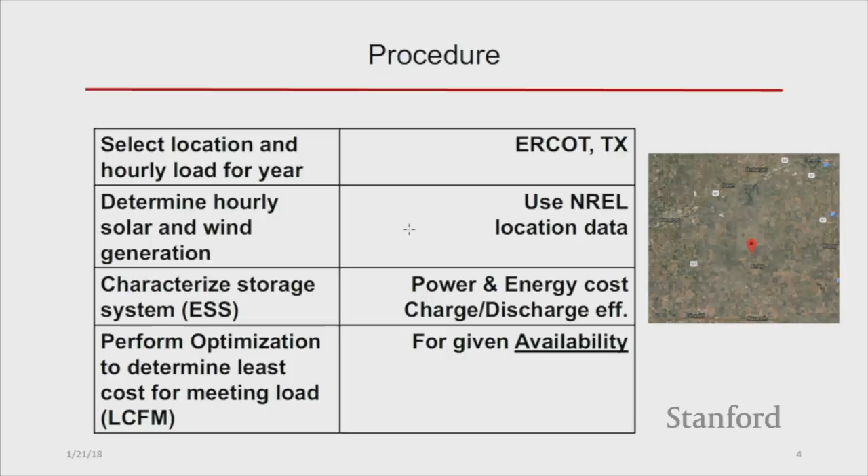And here's how I'm going to look at this problem. I'm going to use this procedure. First, as an example, I'm going to choose one load area. And what I did is I chose a load area as close to my birth date as I could. It turned out to be in the middle of Texas, in the ERCOT service area. I looked at the load, or ERCOT presented me with a load at every day of the year. I think I took the year 2016. I and my colleagues, I should have mentioned my colleagues on the first slide. If you can say Deutch doesn't know anything about storage, Yet-Ming Chiang certainly does. So the demand load I'm meeting is at ERCOT for this year, every day of the year, 100% of the time.

Then we perform an optimization, which I'm only going to give you the results of. I'm not going to go into it. And secondly, that we do it for fixed availability, saying what percentage of that load do I want to meet? Here is the answer on this one chart, and I will spend a few moments going over it.

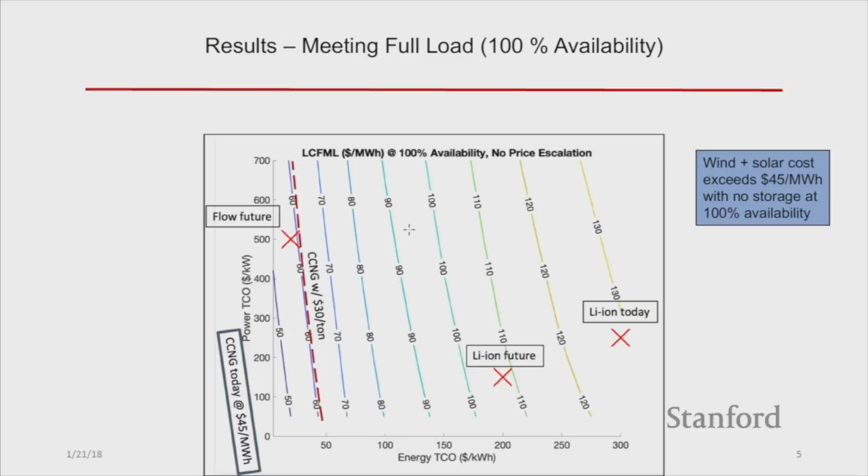On the base is the total cost of the energy system measured in dollars per kilowatt hour. On the y-axis is the power of that storage system measured in dollars per kilowatt. Now, we know where some of those storage technologies are on that chart today, and we have estimates of where they'll be in the future, but I allow you and your investment advisors to say where they're going to be a few years from now. You could choose where it's going to be.

And I should underscore heavily that the storage system here, I'm agnostic with respect to technology for storage. But we are looking at such areas as using more hydro storage, pumped and conventional hydrodynamic storage. We are looking at compressed air storage. And of course, we're looking at an array of battery types. And for the sake of illustration, I use here both lithium-ion batteries and flow batteries.

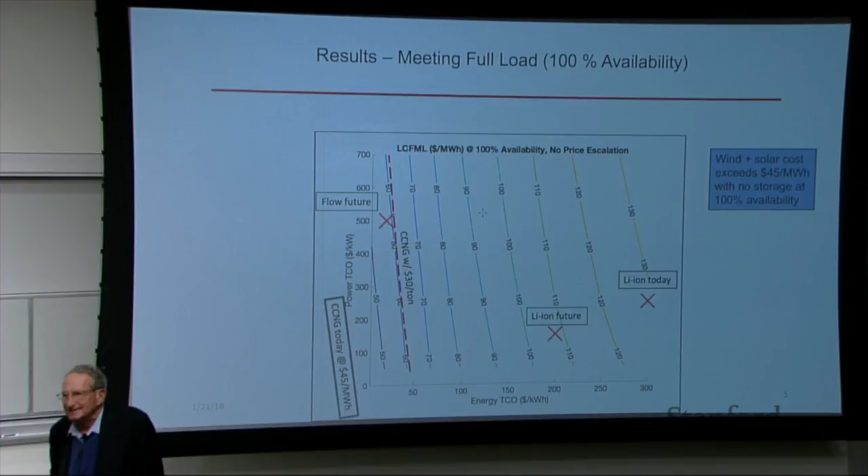And I mark there with an X in these two variables that characterize their cost, power and energy. I mark with an X the present cost of lithium-ion batteries, the projected future cost, and I compare it to flow battery costs. On the chart, the result of the optimization tells you the least cost combinations which will meet that fixed load at that point in the ERCOT service area.

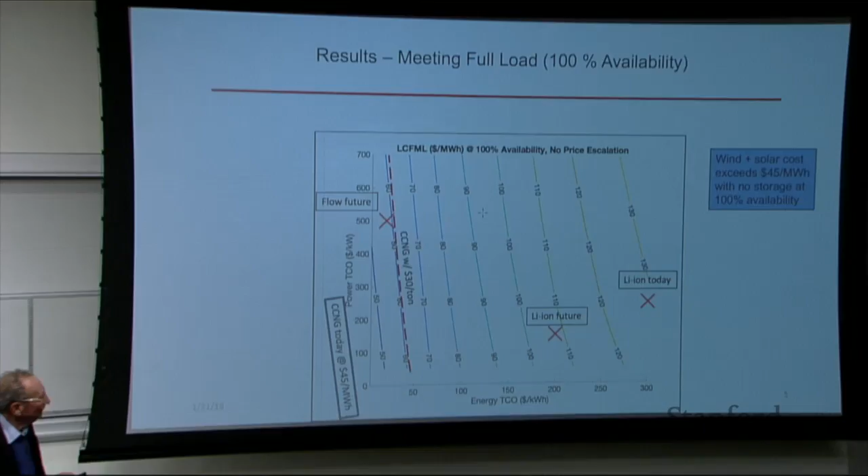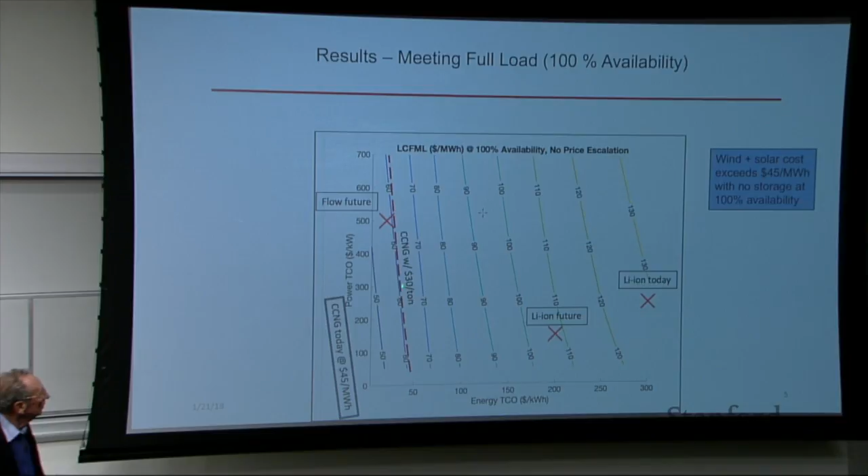So if you look at the curves, they are measured here in dollars per megawatt hour. So they go from lithium-ion today, if you have to use that, you'd be paying $130 per megawatt hour, or 13 cents per kilowatt hour, quite a high price at generation. But if you look all the way in the future, you can see that at the flow battery proposed future cost in the two-dimensional choice that you have, you would be doing $60 per megawatt hour, 6 cents per kilowatt hour, which is what we are told by those reliable people in New York.

Now I've lost the name of the bank, which says, what's that? You see, this is why you can't trust. You just can't trust people here. So they know the names of banks. I don't know the names of banks.

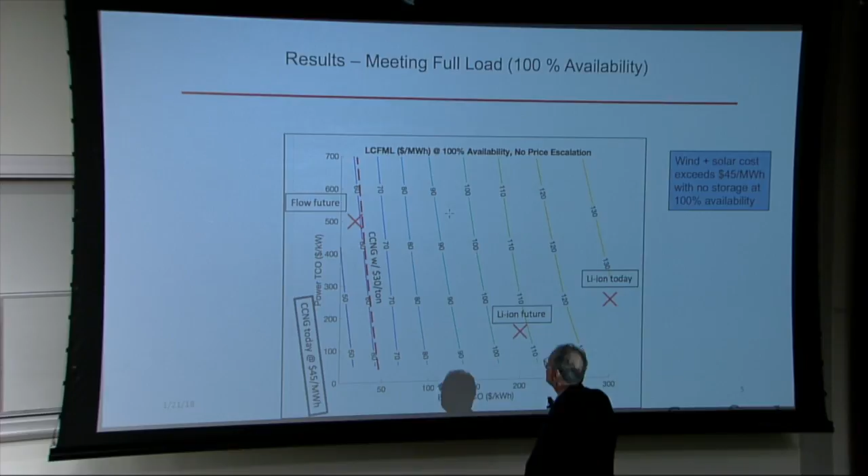So in any event, there it's $60 per megawatt hour, 6 cents per kilowatt hour. And there you see the combined cycle natural gas price falls right on top of it. So future batteries would make it, if you believe that number of the cost of the storage. When wind and solar together exceed $45 per megawatt hour, you are always going to be above the combined cycle natural gas price of today. That's why it lies outside this curve. So that is about it for this chart. It's at 100% availability, no price escalation, and you can choose your storage in these two parameters.

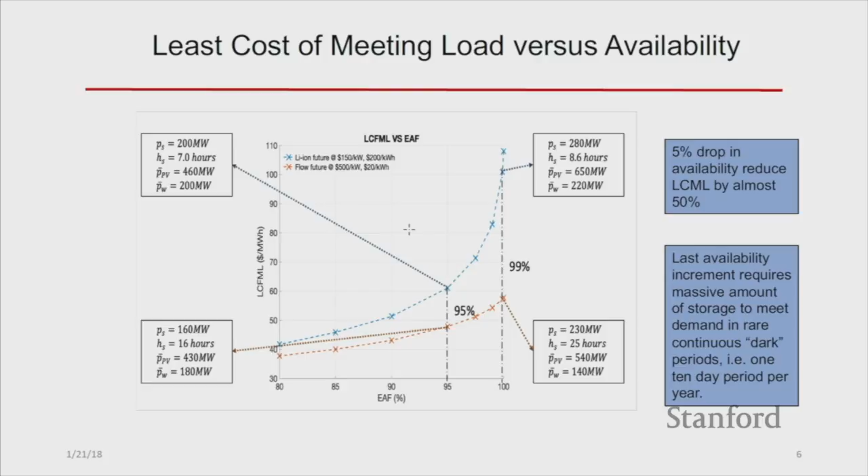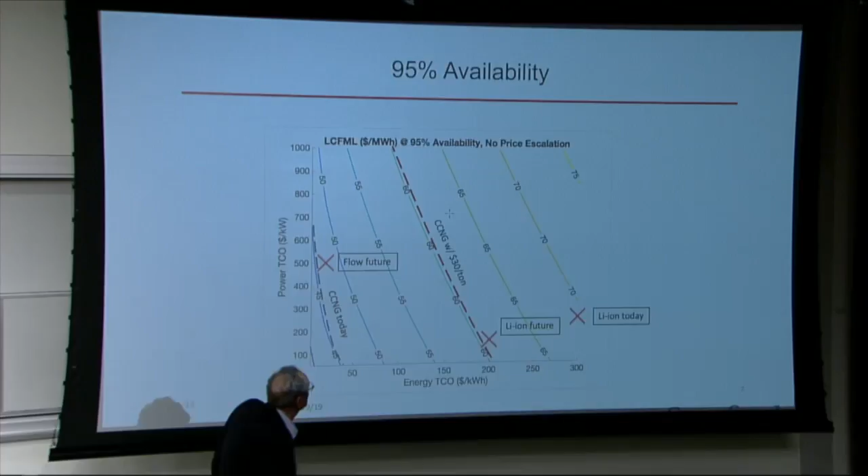If you choose pumped hydro, you have an entirely different point or region on this chart than if you choose batteries or compressed air. Okay. Now, the least cost of meeting that load depends upon the effective availability factor that you have chosen to adopt. If you want to choose 100% meeting that load, then you are all the way up at the highest cost point. The effective availability factor at 100% is way up there.

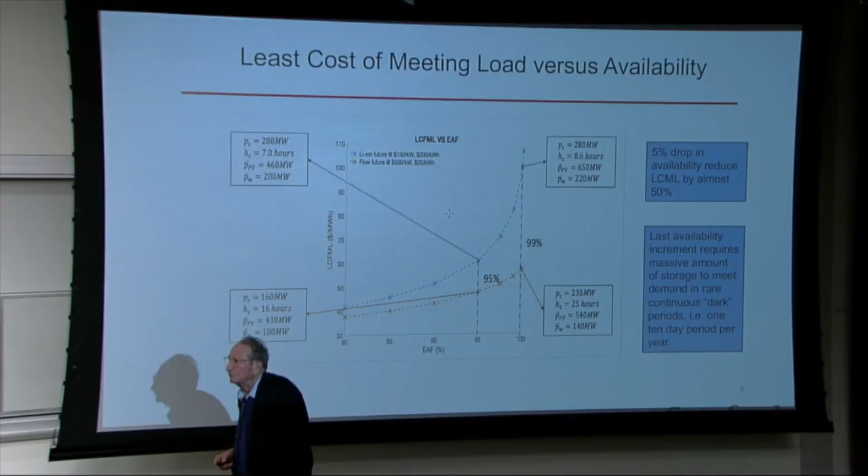At 99% for two different kinds of storage, I just chose lithium-ion future or flow battery futures, you would then have this mix of storage parameters, but your price, as you can see here, is at the level of very high costs here. $100 per megawatt hour, 10 cents per kilowatt hour. Is that right?

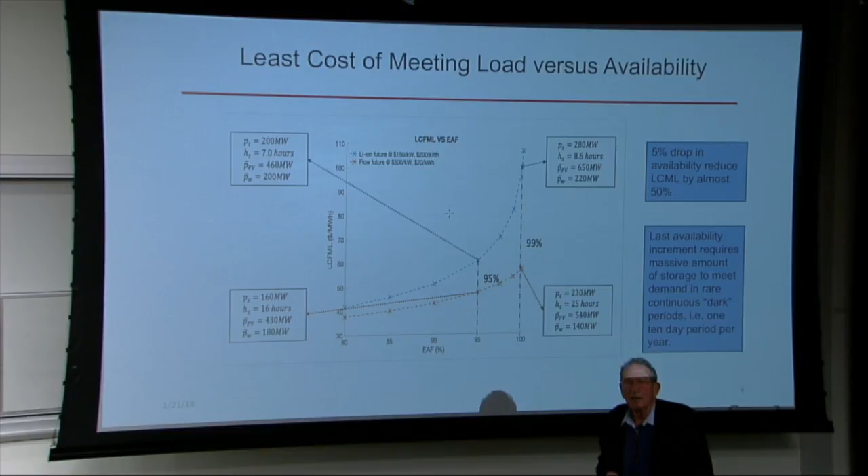Right. But if you bring it down to 95% availability, that is, you give up 5% of the time, you will be choosing another generating technology, one that produces CO2, like natural gas combined cycle. You drop that cost almost by 50%, depending upon, again, the storage technology that you're using. So you have to say to yourself, is it really true that with this hybrid system I want to reach 100%, or will I be satisfied with 95%? And you see here the great benefit that you get by dropping your availability from 100 to 95%. This is the way the curve shifts.

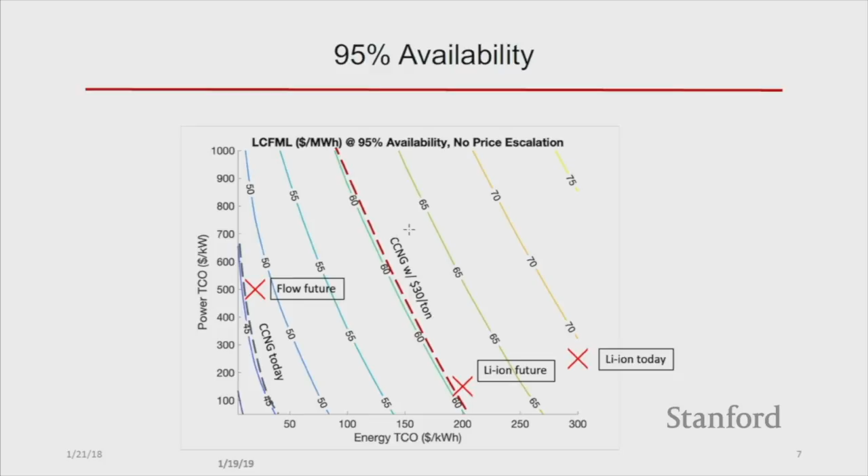And when you look at the calculation with 95%, exactly the same optimization as before, you see that now lithium-ion of the future is exactly the same, or roughly the same, as a combined cycle natural gas with a $30 per metric ton carbon charge. If you look at the flow of the future, you're even in better shape. You're equivalent to the cost of combined cycle natural gas generation without any carbon charge. So you are in the ballgame, very much so in the ballgame, just by giving up that 5%. It's really quite impressive. And it may even be true.

Well, what do I do if I'm 5% short on load? I have to find a way to claw back the load. And the first thing I can do is I can go to the consumers, whether they're commercial or individuals, and say, look, don't use any electricity for this brief period of time when this will happen, and we'll pay you money for that. So there's a demand response to this sharp availability drop. That's one way I can do it.

Another thing I can do is, if I didn't live in the United States, I could build more transmission lines to get more places, origins of generation to the place where I have a shortfall. Of course, that means not only you have to cover that expense, but you also have to deal with the regulatory burdens of getting more transmission. Or the third thing I could do is I could make a deal with a utility or an electricity service provider some distance away that they will agree to have a kind of an insurance pool that they'll provide me.

Or the last thing I can do is I can actually burn some combined cycle natural gas generation and produce CO2. Even there, I urge you to be calm, because Sally is going to figure out a way, and is going to propose a way, to use carbon capture and sequestration for that small sliver of generation to get rid of that. My point is there are many different ways of dealing with the advantage of having only 95% availability rather than 100% of availability. Going for 100% is always a mistake in the world of economics.

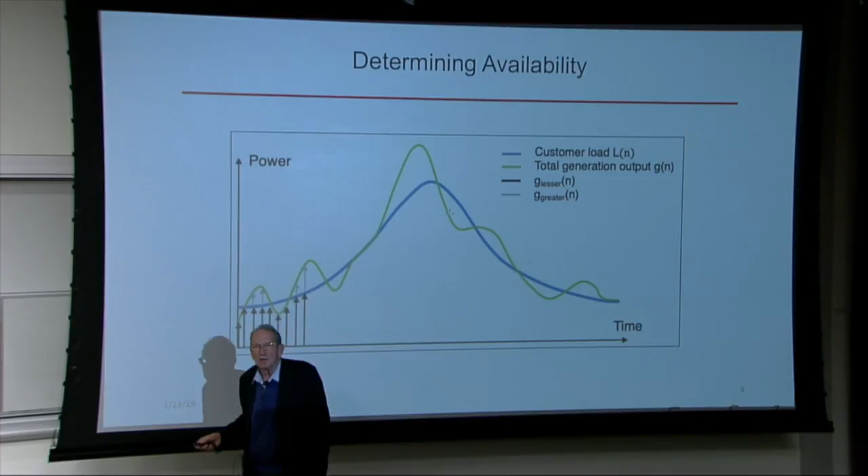But there are other times when the load is above the net generation. And there I'm not meeting load, and I have to curtail load through one of the ways that I mentioned to you. For those of you who don't believe that I can do an optimization calculation of this type, I have collaborators who can.

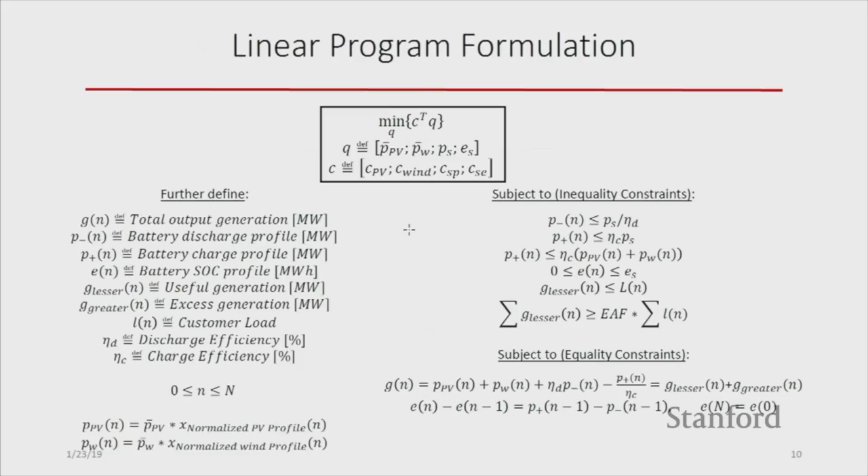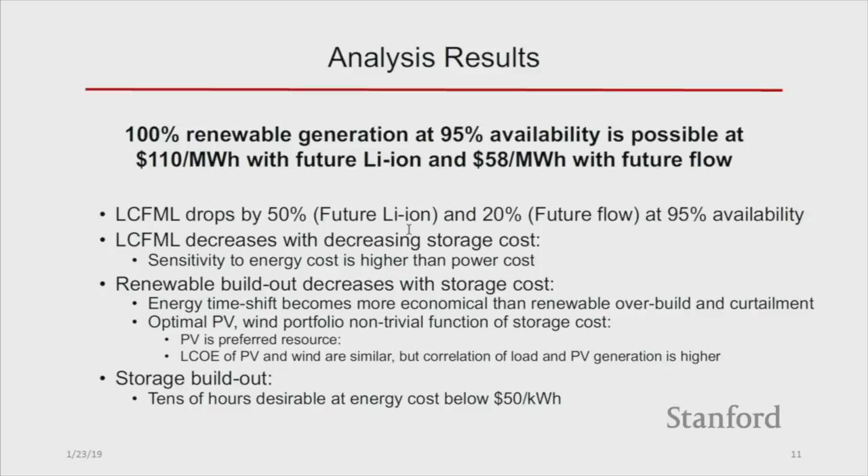What are the results? The main results that I want to share with you today is that the first one is what I said. You are going to find yourself very shortly in a situation where storage alternatives, when matched with existing solar and wind generating systems, will be able to meet load extremely effectively. As I said, dropping 5% of load cuts the costs of meeting the load by 50%.

What happens with respect to different shifts, if renewables become less of a contributor, as of course storage costs go down? Optimally it turns out the amount of wind and solar is about the same at this point in ERCOT because of the capacity factors of these two renewable generating technologies. And if storage gets much cheaper, or if you happen to use very inexpensive and available water, pumped hydro storage, you have a lot of dependence on that storage technology, and you have therefore a larger number of hours per day that are used of that technology.

What about uncertainty? We chose just 1 year, and we looked at that 1 year and said, this is the optimal solution.

But in fact, there is intermittency. And intermittency exists for a fixed load factor. What happens is you can have 10 days of absent dark sun at one time, or you can have the 10 days distributed over a longer period of time. If the time when you have to make up for poor sunlight or poor wind is distributed across the time period, it's easier to have a storage system meet it.

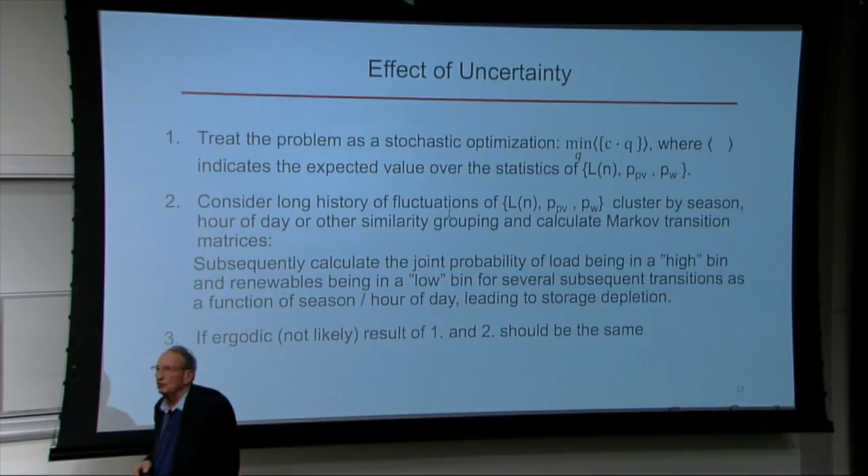If they get bunched together, then you have an intermittency, which is going to be a very, very demanding constraint on the system. So you have to ask yourself, what are the results of uncertainty in this system? That is, if you consider uncertain demand, how are you going to deal with this problem? I hope that's on the next slide. It isn't on. Yes, it is.

Here it is. So what you see is under this case, I have to do a slightly more complicated optimization program, which takes into account the minimization of the cost times the demand quantity day by day in the characteristic year I'm looking at. I have to do a different minimization. And how do I do that? You do that by one of two ways.

I looked at 1 year. Did I say 2016? You'd have to look at 15 different years. And if you look at 15 different years, the intermittency will begin to show itself up and average out between the large number of repetitive time periods that you choose. So you have to have a long sequence of stable data, which are beginning to collect now in all the utilities, at least in the United States, certainly in ERCOT.

Or the alternative way to do it is to try and describe those intermittent times when the sun goes away or the wind ceases to blow by building a Markov transition matrix, a probability description of the specific year you're looking at with different transition probabilities. What if it's dark one day? What is the likelihood it'll be dark the second day? And for that, you need to do the Markov description, and you also have to justify it by making sure that it agrees with the data in the year that you're looking at.

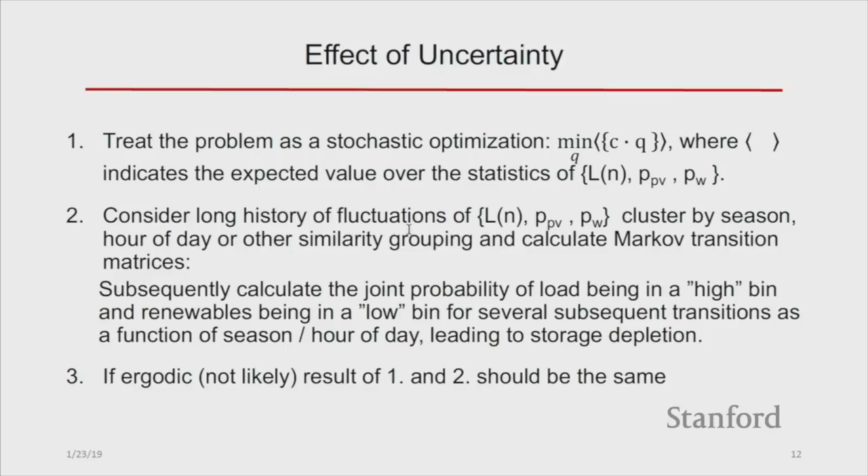You just can't go rushing into this without considering the uncertainty, now not in the sense of capacity factor, but the uncertainty with respect to intermittency, the sequence of events that can be unfavorable to you for more than one period. And I'm told that the worst that it gets in California is 10 days. 10 days of really sharp sequential. That may happen to you once a year.

So, okay, what do I want to do? I have a new proposal about how to encourage this technology pathway. I don't want to do it by somebody in Boston or in California saying there's a mandatory amount of storage that you have to put in your system today. For two reasons. The first is nobody knows how they connect that requirement of how much storage has to be put in with respect to the actual economics of the system that is operating. And secondly, when you do something like that, the private sector has difficulty in seeing through that to how much the actual costs were for this additional social benefit of avoiding CO2 emissions.

So is there a better way of doing it? And I claim, yes, there is. The better way of doing it is to allow there to be a competition between a set of energy developers who will make a deal with a utility system, whether it's one or several particular grids is their question to design, come back in and say, we are willing to undertake a 20-year time period where we will provide electricity either by storage, our choice of what we use, or by wind and solar, our choice of how much of each. And we are willing to do this for so many cents per kilowatt hour throughout that 20-year period.